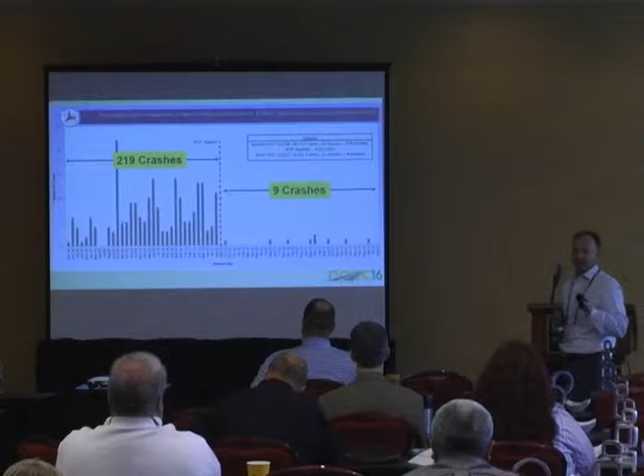So this is like our gold standard of what you can do with this application. Okay, so that's immediately apparent why you want to consider high friction surface treatment, where you don't have other options to fix these run-off-the-road crashes, these wet weather crashes.

Looking at a bigger program, not just one site, in Kentucky, what they saw was a crash reduction with their high friction surface treatment program. We get huge numbers, 90%. These are ramps, curves: 80, 70, 80, 90% crash reduction in wet weather and in dry weather. So it's not only wet weather, but where you have bad geometry, short stopping distances, those types of things.

Where should I use this stuff? Where should I use high friction surface treatment? Anywhere where you can't fix it with other means, changing geometry, that sort of thing.

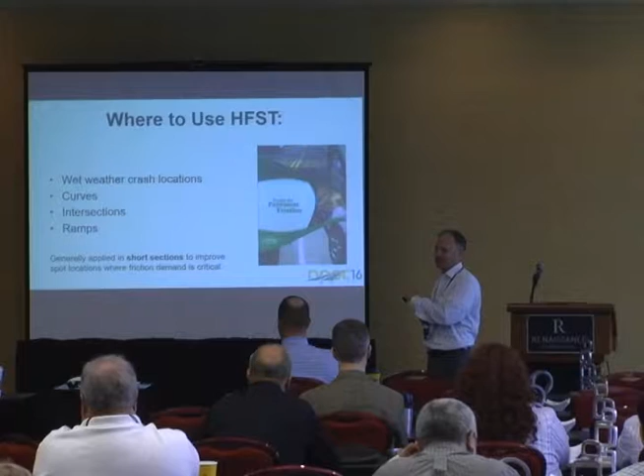Wet weather crash locations - your safety folks are now tuned into these locations where you have high friction demand needs, crash locations due to wet weather, curves where you don't have the right geometry, and speed, since people like to speed into those curves.

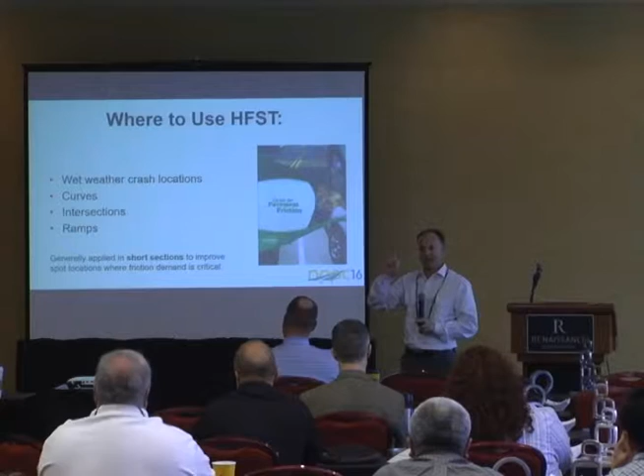Intersections - you don't have enough stopping distance, maybe not enough sight distance coming into an intersection, so people have to slam on the brakes. Anywhere you see skid marks on the pavement right before intersections, a lot of black on the pavement. What about those curves where you see a lot of rubbing on the barrier rail, full of paint and tire marks?

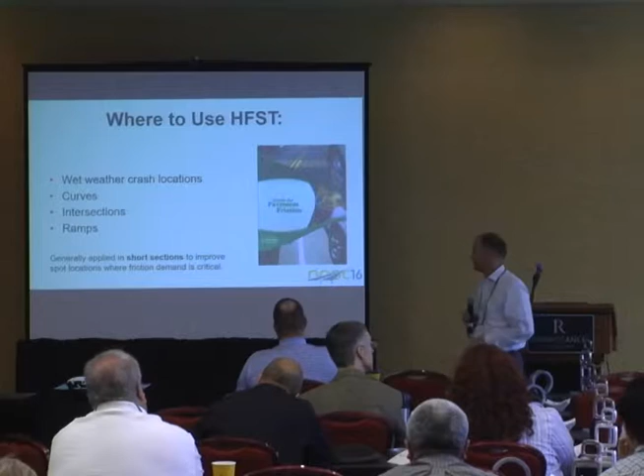That's maybe a place you want to consider high friction surface treatments. One big thing - this stuff costs quite a bit, $20 to $30 a square yard, so it's generally applied in short sections, quarter-mile sections. It's a spot treatment for these locations, not an overall pavement surface treatment. We'll talk about some other surfaces we're looking at that might be applicable to the whole pavement surface.

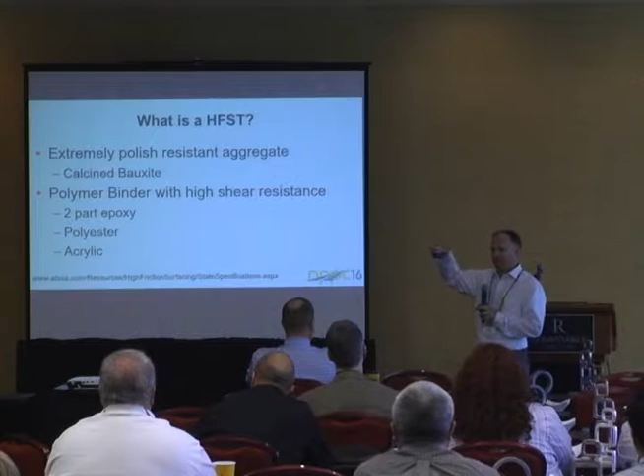What is high friction surface treatment? Well, I have the two parts here. I have a little - my wife's a kindergarten teacher, she calls this an activator - you pass it around, you touch it, people get involved with the subject.

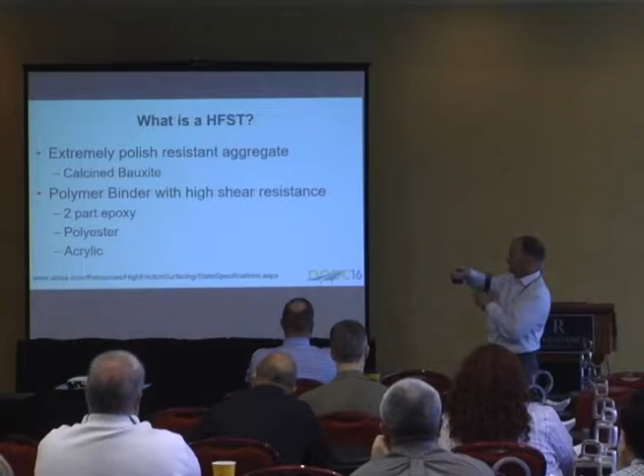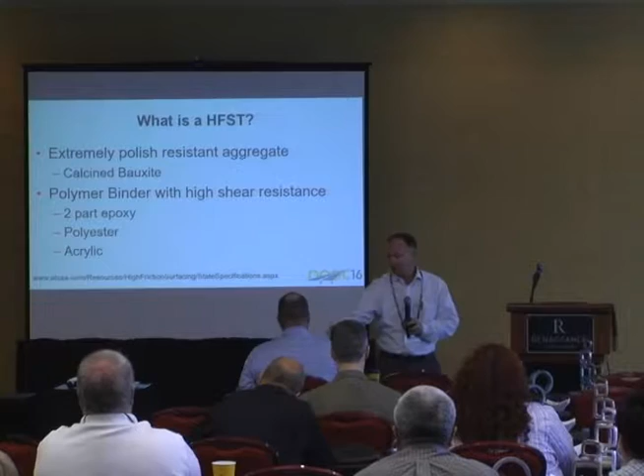I've got the two parts: a calcined bauxite aggregate, usually it comes from China. And then on the bottom here, this is a dynamic friction pad that we used, and you can see the epoxy down there - a two-part epoxy that is mixed in construction, put down on the pavement, and then the calcined bauxite is laid with a chip spreader or a blower. We'll show you both applications.

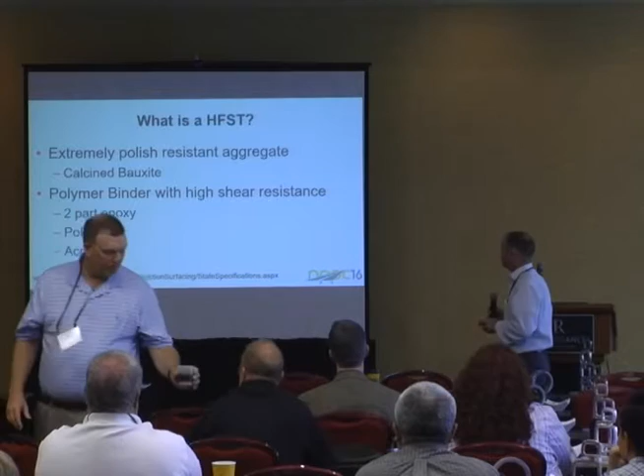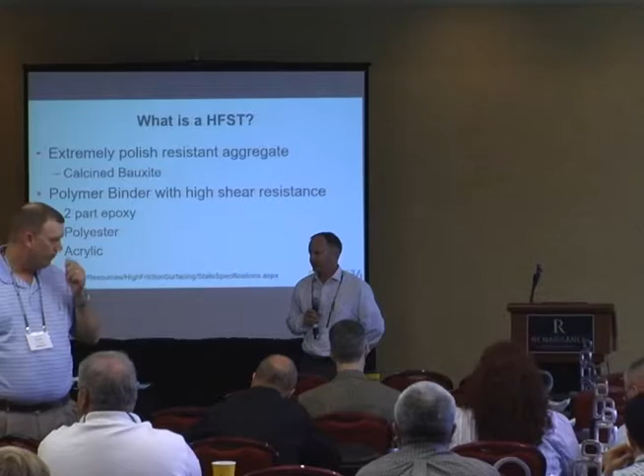There are other types of polymer binders used in high friction surface treatment, however, about 90% of them are this two-part epoxy. So we're just going to focus on that since we only have about 30 minutes today.

Now, what's this epoxy material? Does anybody put two-part epoxy on your garage floor? I did it - you buy it at Home Depot, you mix the two cans and you lay it on the floor and it heats up. There's a chemical reaction that heats, you can feel it heat up. That's what this stuff is - not exactly the same, there's all kinds of chemistry that goes into these polymers.

This stuff was originally developed for bridge deck treatments, an application to concrete bridge deck treatments, and now it's being applied to asphalt pavements. But anyway, it's two-part epoxy, comes part A, part B.

This is a semi-automated installation where you have these pistons - a part A piston, and on the other side part B pistons, and they draw the epoxy into the piston to get the right amount. In this case it's a 50-50 split between part A and part B. Once those pistons draw enough material, they fire, so you make sure you get an accurate mixing of the material.

I don't know if anybody's seen the hand mixing - when this stuff originally started, there was a lot of hand mixing application, 5-gallon buckets, mixing it in drums. This is a little bit more sophisticated system, a better application, to make sure you get the mixing rates correct and all that good stuff.

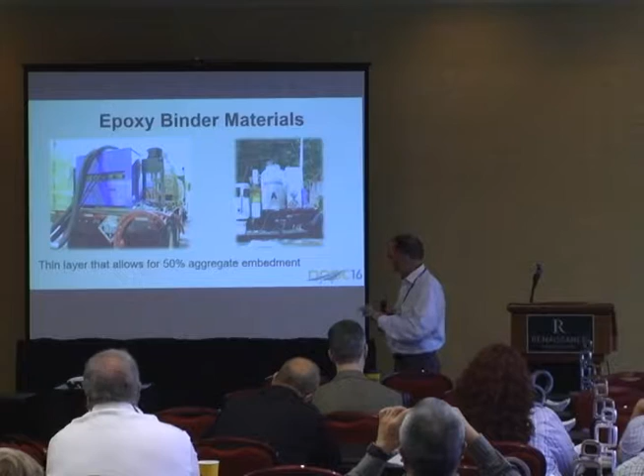So we put that epoxy on the pavement surface, a thin layer, and we'll allow about 50% embedment of that chip into the pavement layer. So I'm passing around the calcined bauxite - this stuff, like I said, most of it comes from China, so it's fairly expensive aggregate.

Bauxite is the same stuff that aluminum is made from. So you take this bauxite, it's like a clay material. Calcined means it's fired, put into an oven and fired to a very high temperature, which makes it very hard and very brittle.

We tried a lot of different aggregates - this stuff is expensive, can I use some other aggregate, can I use this process with some other aggregate? You cannot - we tried it, we tested it, and I'll show you some results. We tested a bunch of different slags, trap rock, flints - a lot of flints out there we've tried - and you don't keep that high 65-plus friction number. So this is the gold standard, the ultimate friction aggregate out there currently. It comes in super sacks, they ship it to you in super sacks.

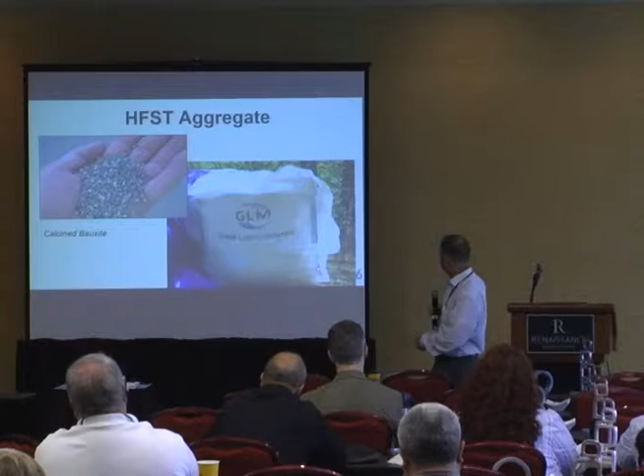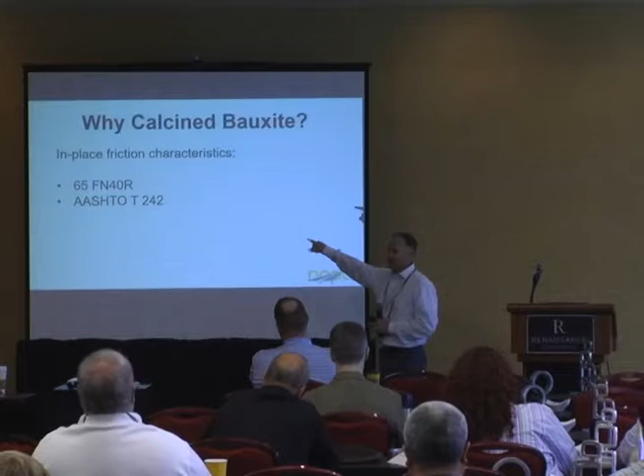So like I said, why calcined bauxite? Why can't we use the locally available aggregate that we have? It'd be a lot cheaper. It's just that you cannot get these super high friction numbers off the locally available aggregate. So we're talking about the gold standard, using calcined bauxite with the epoxy.

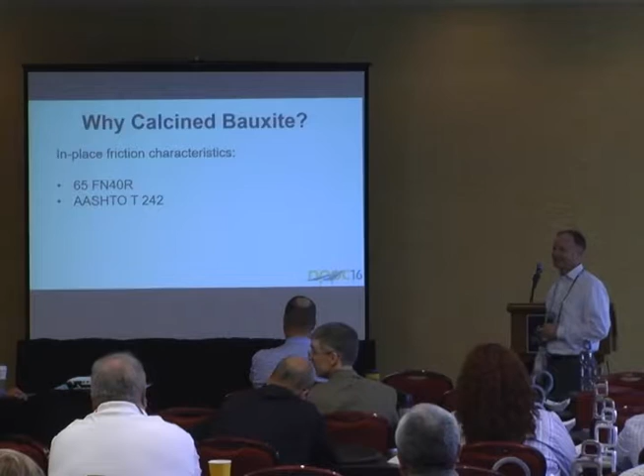Question—what about the dust itself and the impact to the workers? I haven't seen any of the workers using dust masks or anything like that. I've been out there, but I'm not standing right behind there like they were. I'm standing a little bit off taking pictures, but it maybe came across like it's a lot more dusty looking at that video than it really is. It really isn't, it isn't super bad out there. I haven't seen the workers wearing dust masks.

As I said, you want to reclaim this aggregate because it is expensive, so they have a vacuum sweeper to get all that aggregate off. It's not going to break windshields because, as you saw, it's a very small aggregate, but you do want to reclaim it just from a cost perspective. Best practice is to mix the reclaimed with the new aggregate so that you get a mix. As this aggregate goes through the process, it does break down and get a little bit more dusty, so you do want to mix that in with the new stuff.

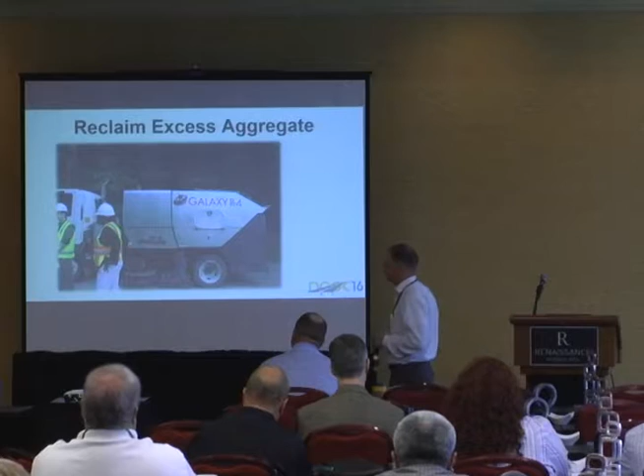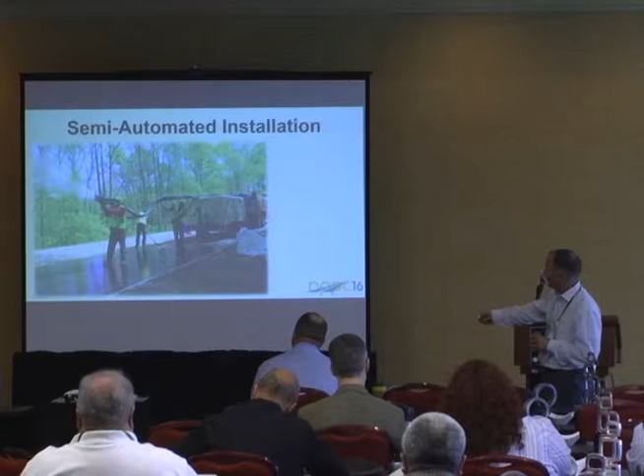This is the semi-automated installation. You can see this guy here with a blower—he's blowing the aggregate onto the surface. This is the epoxy they hand spread. Here's the wand—the epoxy comes out of a wand. They still have the pistons here mixing the epoxy, but he's hand applying with a wand, and these guys have a rake, a squeegee, a notched squeegee, and they squeegee the epoxy on the surface.

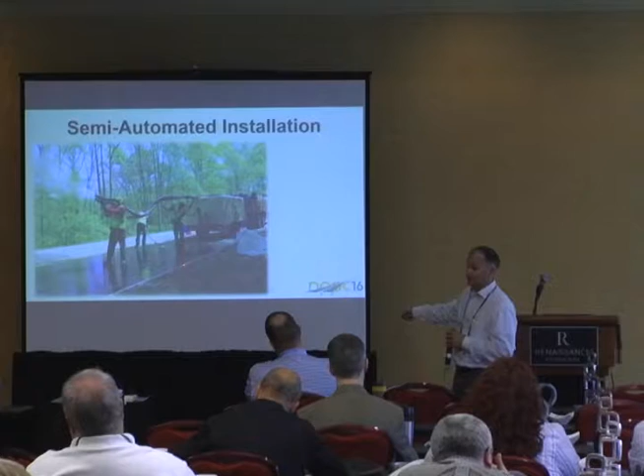This is a much slower process. You also have guys here shoveling rock to make sure they get any surface that hasn't been covered completely. You can keep the stripes—you can tape inside the stripes and keep the stripes if you don't want to restripe the roadway, so that is a cost savings too.

Some of the details—here's the notched squeegee. Now you've got to replace these squeegees because those notches will wear down as you go down the pavement. There's a bit of an art to getting the proper film thickness, so you don't want to press down on that squeegee too much because that'll decrease the film thickness.

So the automated process takes a little bit of the variation away compared to the previous installation, and it's much faster. Here's a finished surface from the asphalt pavement.

You're talking one or two chips thick, so it's a very thin application. Has anybody rubbed their hands on this stuff? If you fall on it or rub your hand, you will bleed. This stuff is very, very sharp and angular. When this aggregate breaks, it doesn't polish. It actually breaks and reestablishes the friction, reestablishing the chip, the very high friction surface.

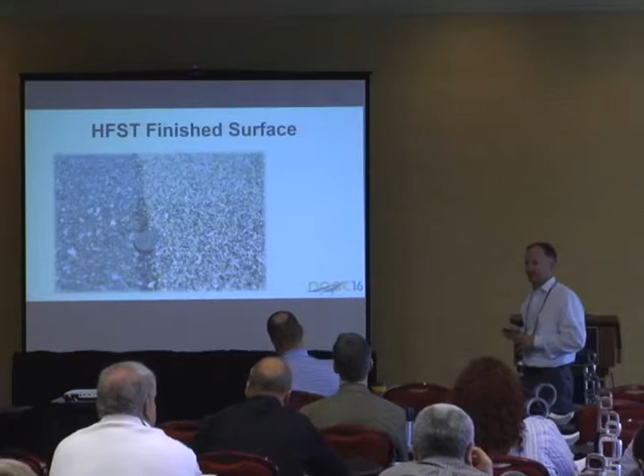So what Federal Highway is doing, we realize this costs a lot of money. What if we could come up with a cheaper alternative? Maybe we don't need that 70 friction number, that really, really high friction number. Are there materials out there we can use that get slightly lower friction, still meet the friction demand, but can be applied over the whole surface of the roadway at a cheaper cost?

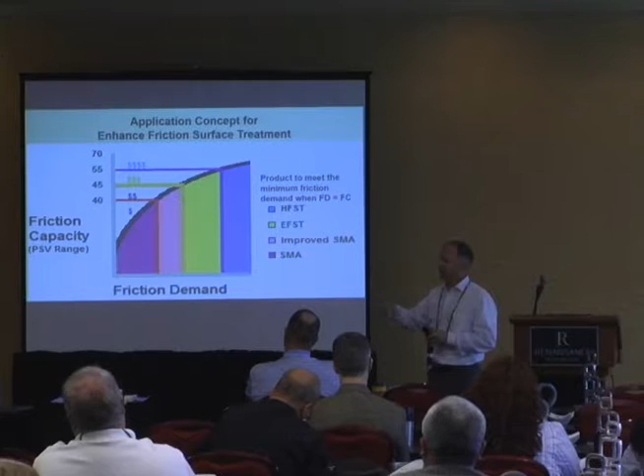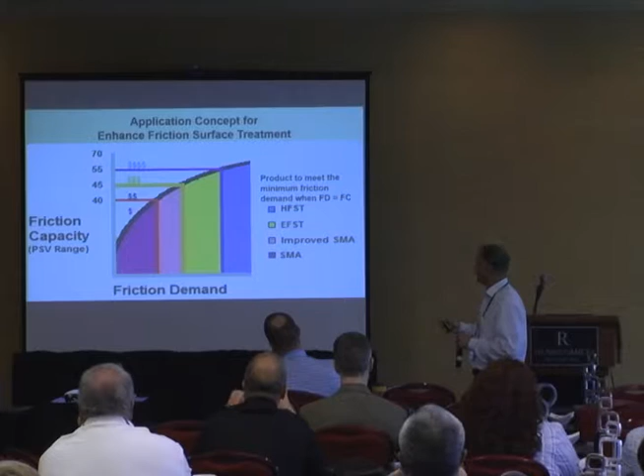So this is kind of the concept we're looking at. We need a friction capacity depending on your conditions out on the roadway, wet weather conditions, curves, those types of things. Do we always need that high friction surface treatment at 55 or plus? Can we get by with something we're calling enhanced friction surface treatment? I'm going to talk about an asphalt-based alternative we're looking at, or you can use other surfaces like SMA or chip seal to establish friction.

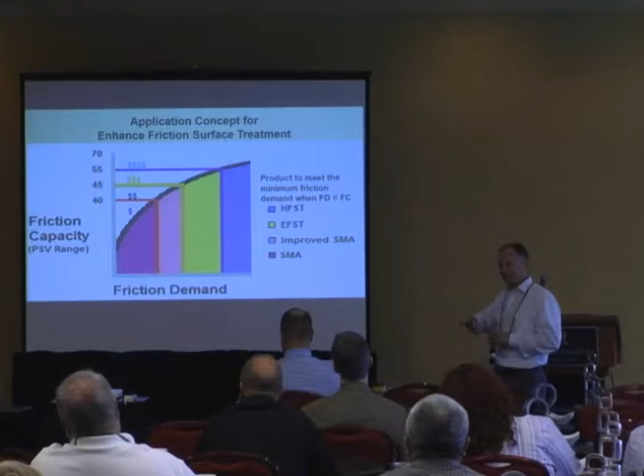We have a study going on right now to define this friction demand. How much friction do you need? Our safety folks are working on what conditions require what level of friction, so we're still yet to define this axis. We're working on that, that's really what we need. Right now we're saying we've got a great friction product, use it everywhere you have crashes that require more friction, but we may be able to back off on that. We need to quantify that so we know how far we can back off.

Like I said, we've placed a lot of these. Federal Highway has sponsored a lot of sections on the west curve. There's some on the east curve that Florida did, I think this is the 4th or 5th cycle. Federal Highway placed a lot of epoxy curves here. We did granite, chert, sandstone, flints, and bauxites. The bottom line is the bauxites performed over time - they definitely separated themselves from the local aggregate sources. That's why the AASHTO specification calls out for calcined bauxite.

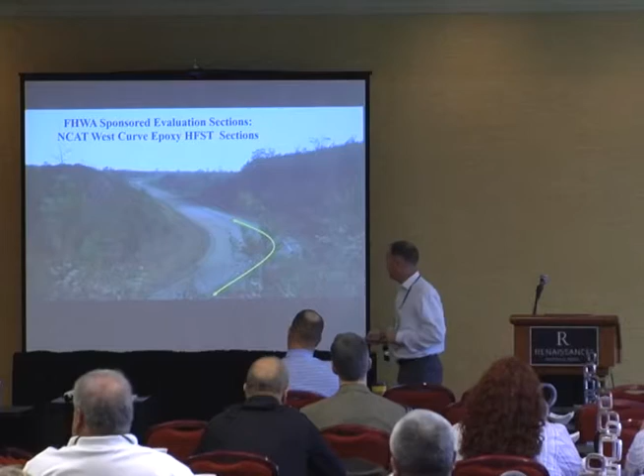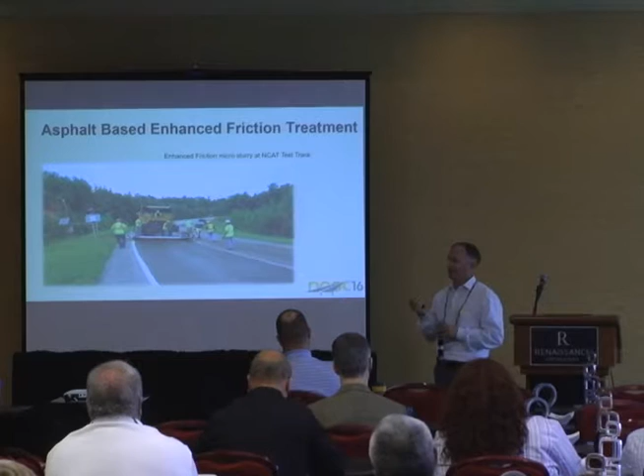We also placed, this year on this cycle of test track, an asphalt-based enhanced friction treatment - a micro slurry. The difference is this has a high polymer content emulsion, and it has 50% calcined bauxite, the coarse fraction, plus 4 material, and 50% limestone. It also has some fine limestone to create a mastic for the microslurry. Microslurries need that mastic, so fine limestone on the coarse fraction, 50% limestone and 50% calcined bauxite. The idea is the limestone will polish away and expose the calcined bauxite, giving you friction.

I didn't know if it was going to work. When Mike Heitzman talked to me about this, I'm like, I don't know, that seems fishy.

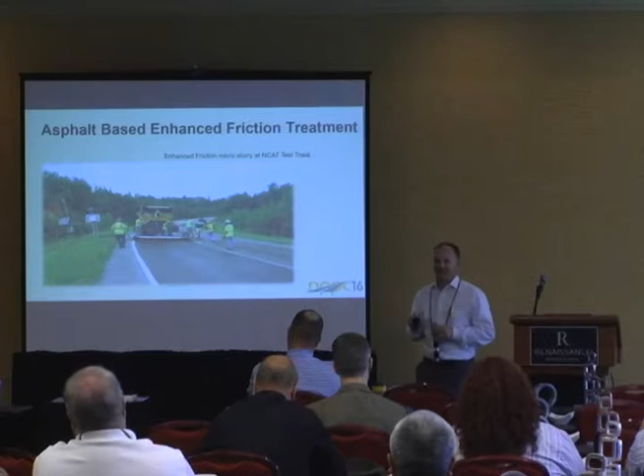This is the finished surface, kind of hard to see - it's always hard taking pictures of asphalt, right? It's a black surface, it's difficult. So as I explained, on the coarse fraction plus 4 it's 50% limestone, 50% calcined bauxite. It's a micro slurry, so a very thin application. The fine fraction is limestone screens - you want to keep that mastic in there. The big deal is we need shear resistance. You're in a curve, you're going to have high shear friction with the tires, so you need shear resistance. What kind of binder can we use to get that shear resistance and prevent chip loss? High polymer modified emulsion.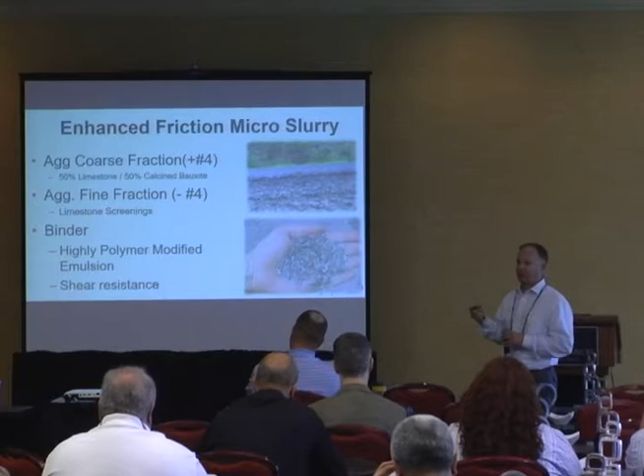So here's the results. This was put down in September, we've got about 6, 7, 8 months or so of data. This is the high friction epoxy calcined bauxite that was placed in 2011, so this has 10 million plus, maybe 12 to 15 million ESALs on it right now. This has got more traffic on it, okay, I want to be fair. That was placed in 2011.

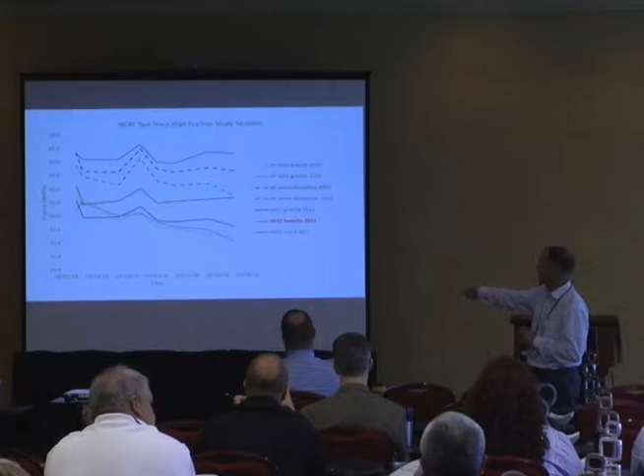This is our high friction calcined bauxite limestone mix placed in 2015. Right now it's looking very good. You can see you're not going to get those very, very high friction numbers, but you're getting very, very good friction at a much reduced cost. We tried some sandstones in here just to see - it looks like the sandstone is polishing, coming off, maybe not the best. It looks like the calcined bauxite really is the key to keeping that friction number. We're going to see how this plays out over time.

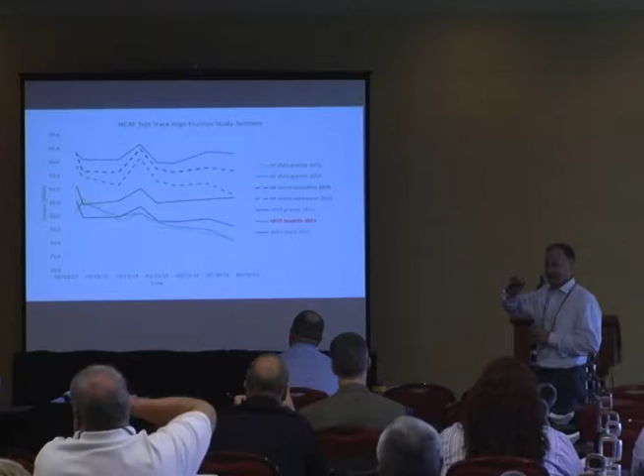If it stays flat, I'm going to be a happy guy. We reduced the cost from $20 to $30 a square yard down to about $5 to $10 a square yard, and you're getting slightly reduced friction.

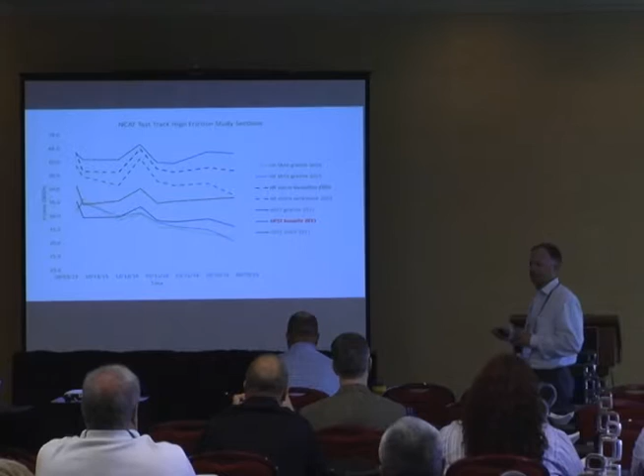And then we're going to start developing those. Where can we put this? Where do we need the gold standard? Where can we put this slightly lesser material?

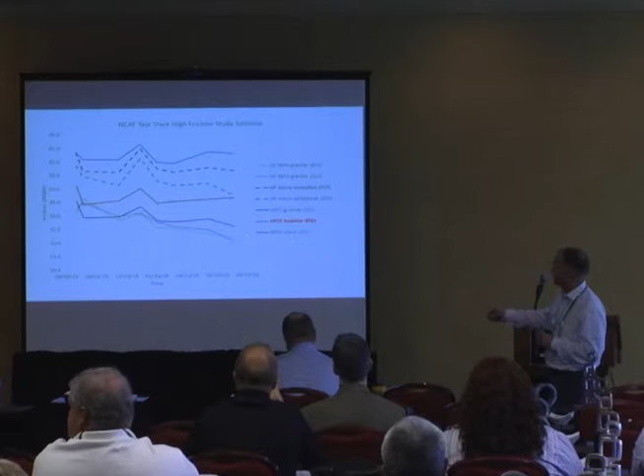Over here is all those high friction surface treatments that were placed in 2011 with those granite, chert, sandstones. These are those sections. You can see quite a bit less. Now these have 10 million ESALs plus on them, so there's a lot more traffic on there, but they don't hold up near as well as the calcined bauxite.

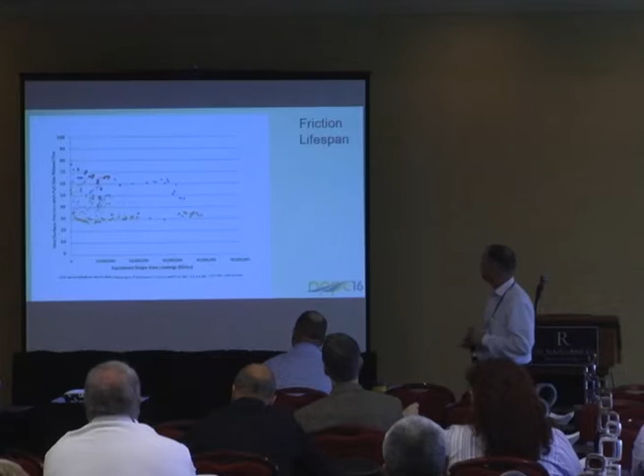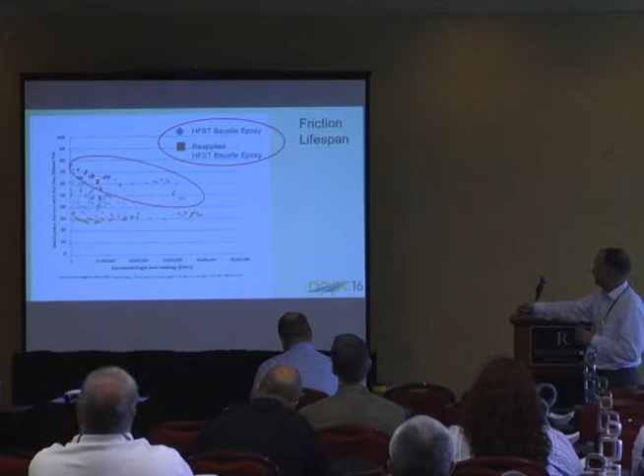Now what's the lifespan? This is kind of the totality of data over the ESAL range, okay? It's kind of hard to see, but let me break it down here. High friction bauxite epoxy are the blue and the red. So we got 35 million or so ESALs out of the high friction surface treatment epoxy. That was on the east curves on the Florida sections. It started to break down.

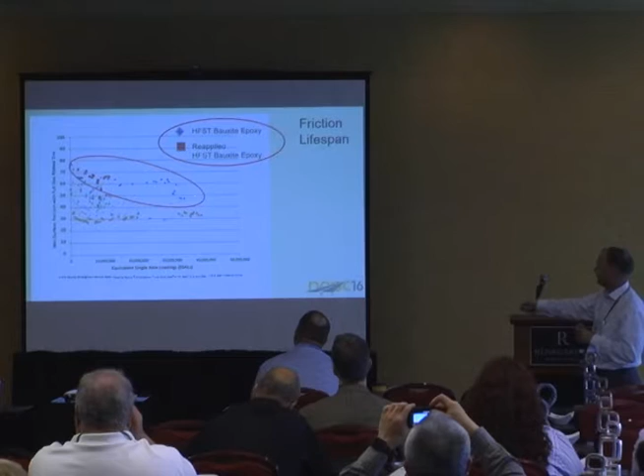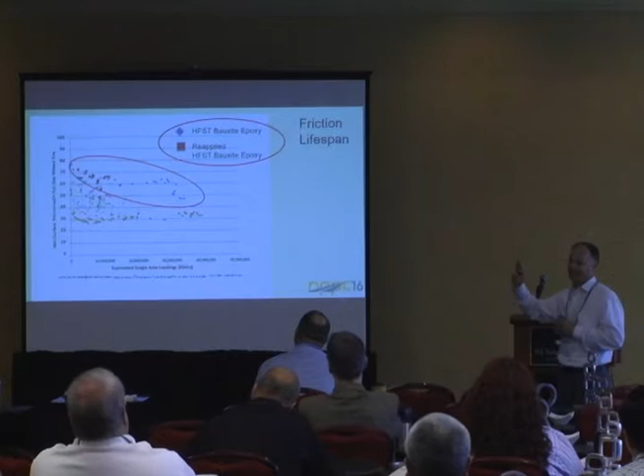What you saw is after 35 million ESALs is a lot, and that's over a lot of summers and winter cycles. Now it's Alabama winters, but a lot of traffic on here. You saw it steady from 60 to 65, so it retained its high friction properties over a long lifespan.

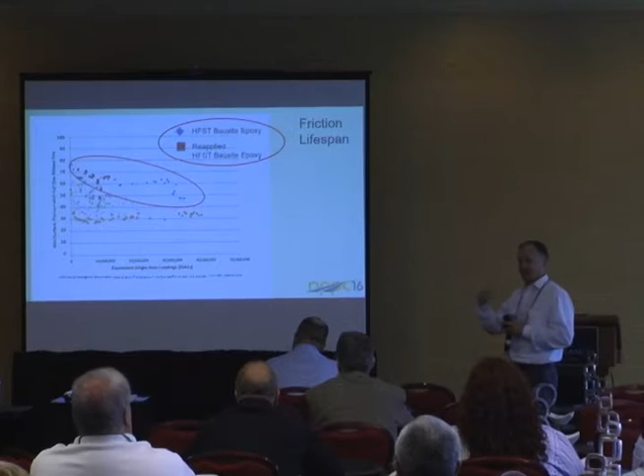It started to drop. This was hand applied epoxy, and what you saw was you'd have strips of high friction aggregate still there, and then strips that had come up. It looked like maybe some hand application didn't go well, but it still lasted 30 million ESALs. It seemed like some application issues were why that stuff kind of came up. You had a drop of friction, reapplied to that section, and kind of the same curve established itself.

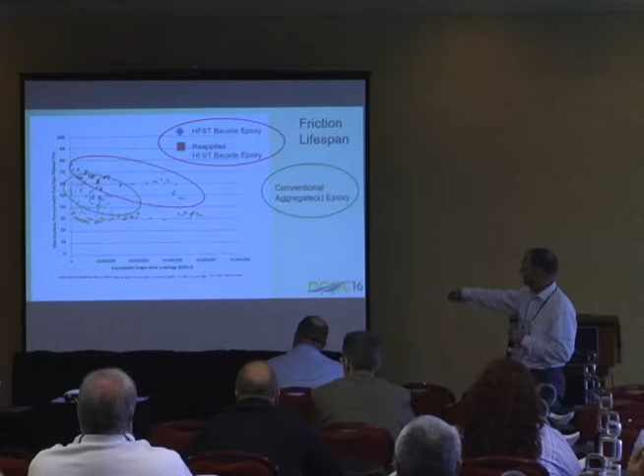Conventional aggregate epoxies, same polymer epoxy that we use, but with conventional aggregates, the cherts and the granites, show lower friction numbers and more of a decline. You see a steady decline in the 40s to 50s range.

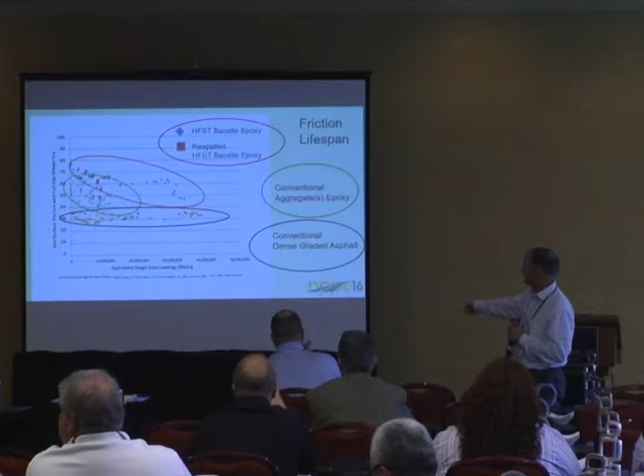And then conventional dense graded asphalt. So we always compare it to a conventional 12.5 millimeter Superpave mixture. So you can see the difference from conventional asphalt and the different layers.

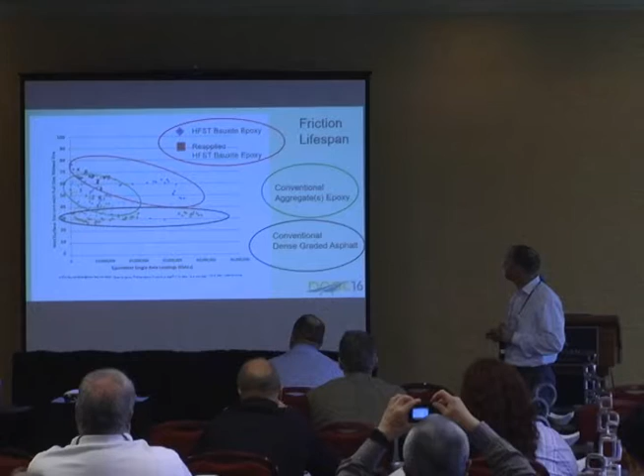So what we're trying to develop is this friction engineering toolbox at Federal Highway. How do we wrap in this pavement preservation concept to this? With the epoxy high friction surface treatment, there's really not a pavement preservation concept because you're spot treating. With asphalt-based, if you have a polymer modified micro slurry, you're going to get a pavement preservation aspect to that. So we're going to look at that with the stuff we're doing at NCAT and see how many years it extends the life of that pavement.

So you're getting kind of two things there. And then we have other things like a high friction thin lay. What kind of pavement preservation aspects can you get from that? And you also ask, what friction capacity do I need versus what costs? So there's a balancing act. We're going to work, Federal Highway is working on what friction demand you need, and can you apply some of these other treatments?

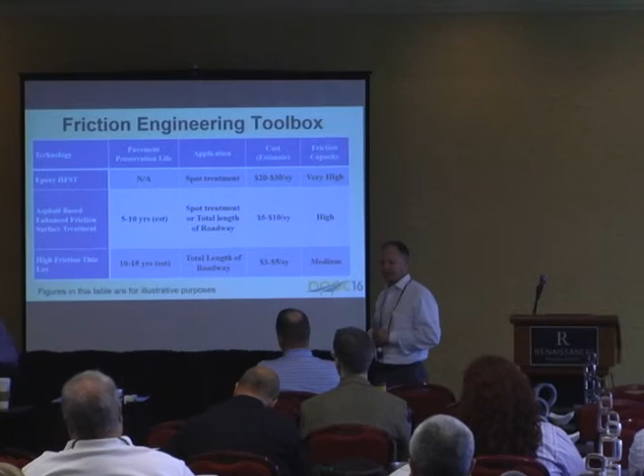How am I doing on time? I got 5 minutes. 5 minutes, okay, perfect.

Danny Lane, I didn't see him here. He's here at the conference, I saw him yesterday, but he's a big champion for high friction surface treatment. In fact, I brought an award for him because he's done such a good job. I wish he was here, I could present it to him. So if anybody sees Danny, tell him to just come here and we'll give him his award.

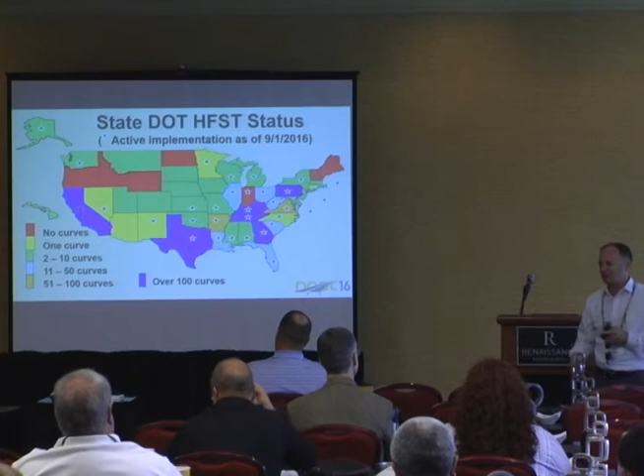They really have, they've gone gung-ho. He's been working on both the training with ATSSA. He's really done a yeoman's task. The specifications, AASHTO specifications, he's been working with us, done a great job, and they've done quite a bit of work. Georgia has done, I don't know, they've put out just a ton of projects of high friction surface treatment, really seeing the crash reduction.

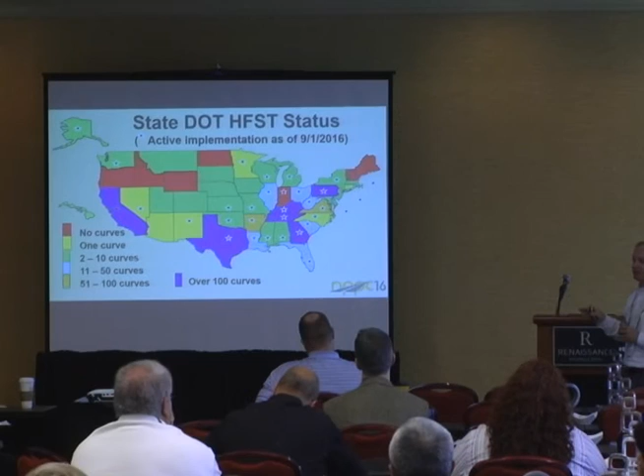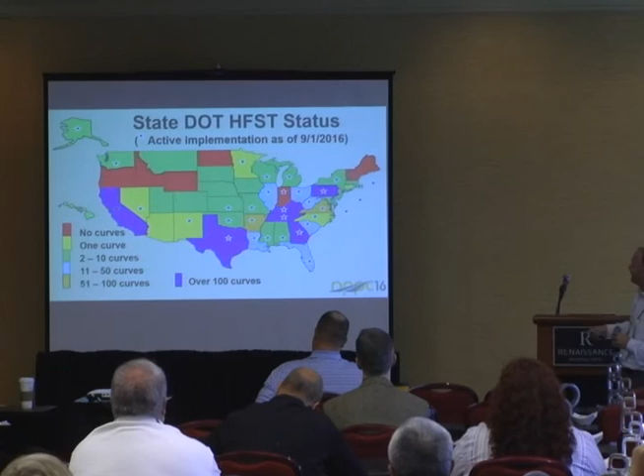So the states in blue have kind of a lot of work in high friction surface treatment. The star indicates states that have an active program, it's kind of standard practice. And then you've got the range of, you know, if they just tried it or if they're getting along in the use. But really blowing up.

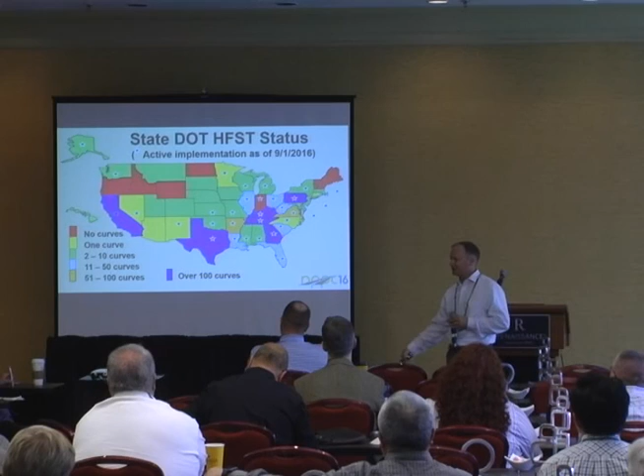I think two people have talked to me, Arizona said we're doing our first one this year, and New Jersey said we did our first one last year, and really exploring this.